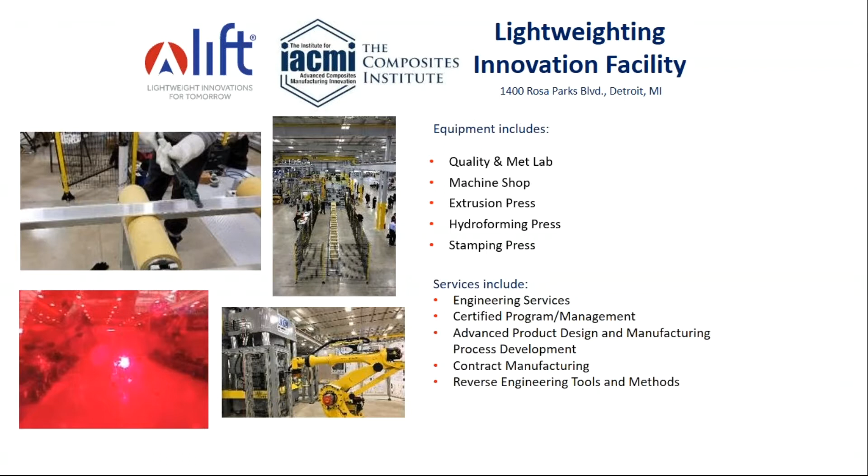Here at our facility in Detroit, we share some space with IACMI, one of the other institutes that focuses on composite materials, which is apropos for our conversation today. We have a 100,000 square foot facility here in Detroit, and you can see on your screen some of the equipment that we have available for your use and your R&D use. You can give us a call and schedule a tour or schedule some time on any of those machines. We'd be happy to show it to you.

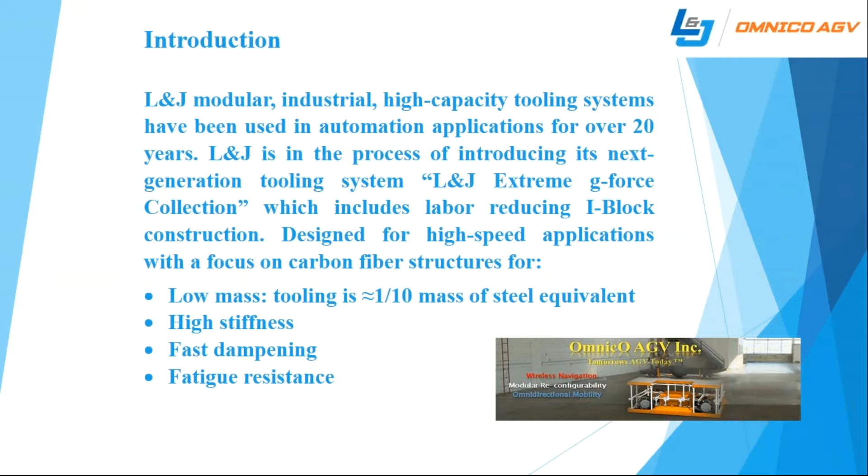So my name is Jerry Van Ness. I'm with OmnicoAGV. I'm a member of both LIFT and OmnicoAGV. I've been in the automation tooling business for over 20 years. On this webinar, I would like to focus on transfer of extreme large size automotive and aerospace panels, plus construction of AGVs, which is automated guided vehicles, with a focus on space frame construction that is easy to modify for shape, size, and capacity. I will show why our hybrid metal and composite tooling system, supported by both LIFT and OmnicoAGV, provides higher throughput than current tooling systems. Our product is called L&J Extreme G-Force Collection. It features interlocking blocks, or I-blocks as we call them, to construct tooling.

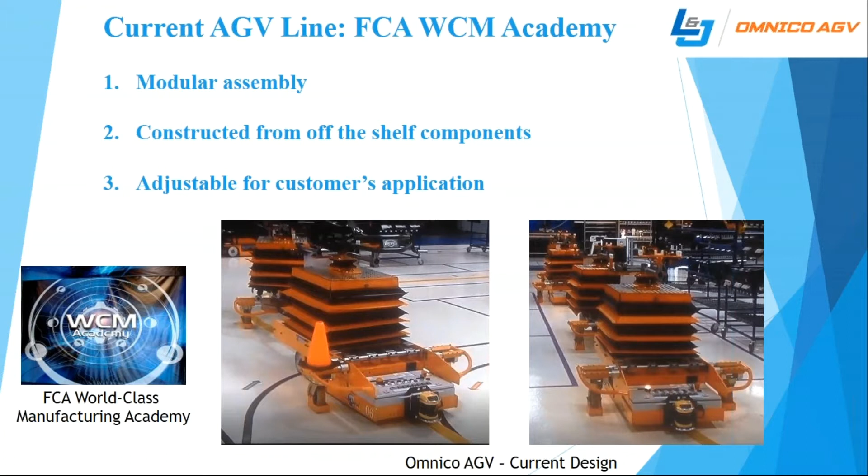These are a few of the customers we have been doing business with. FCA at the bottom, Fiat Chrysler Automobiles, World Class Manufacturing Academy. We have built an AGV assembly line that you'll see on the next slide. Our tooling system has been in manufacturing plants for over 20 years. At Fiat Chrysler World Class Manufacturing Academy, flip the next one, we built an AGV assembly line that is all modular construction from standard components. No welding. Advantages are reduced build times using off-the-shelf components. Modular components allow for ease of assembly and adjustment.

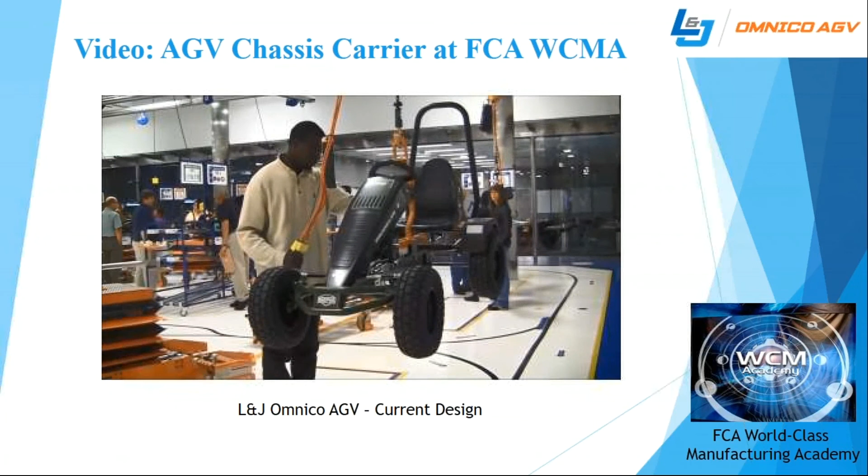Ability to reconfigure. The main appeal of a modular system is flexibility that extends over the life of a structure. Being able to easily move things around and make small changes while the structure remains in place can be invaluable, allowing for optimization of the assembly process over the life of a program.

This video is similar to the unit AGV at Chrysler World Class Manufacturing Academy. The video shows employees... can we go back to the other video? Just

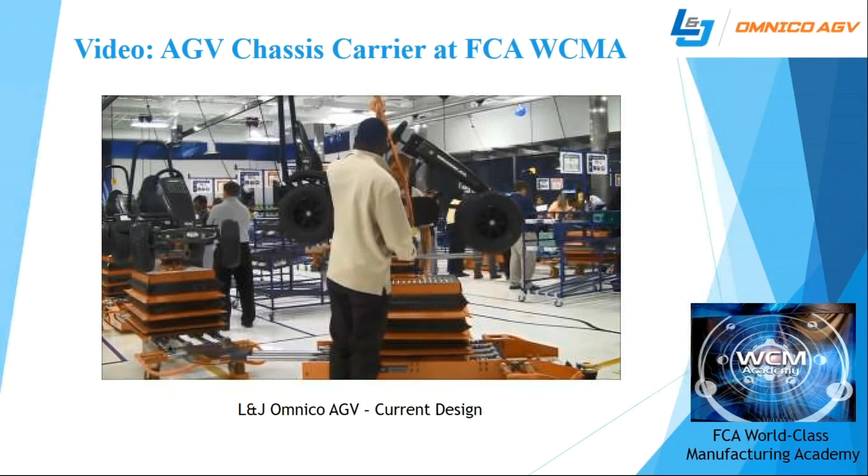Go to this video. The video shows the Fiat Chrysler Academy Employee Training Center. The AGV assembly line is the main focus of the academy. Each assembly transport vehicle has a lift platform that can be adjusted to the work height to match the process. The moving line teaches the entire assembly process of a vehicle. The last stage is removing the completed vehicle. The vehicles are later put back on the moving AGV for disassembly. This process is repeated many times during the day. Now if we can flip to the next one.

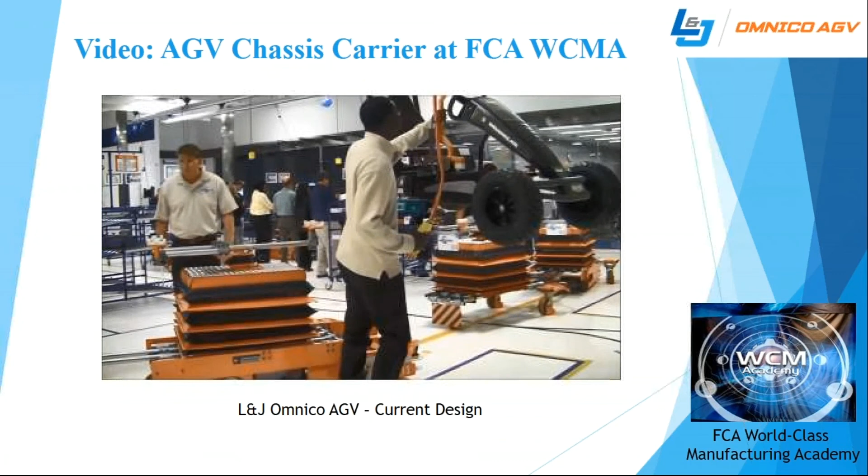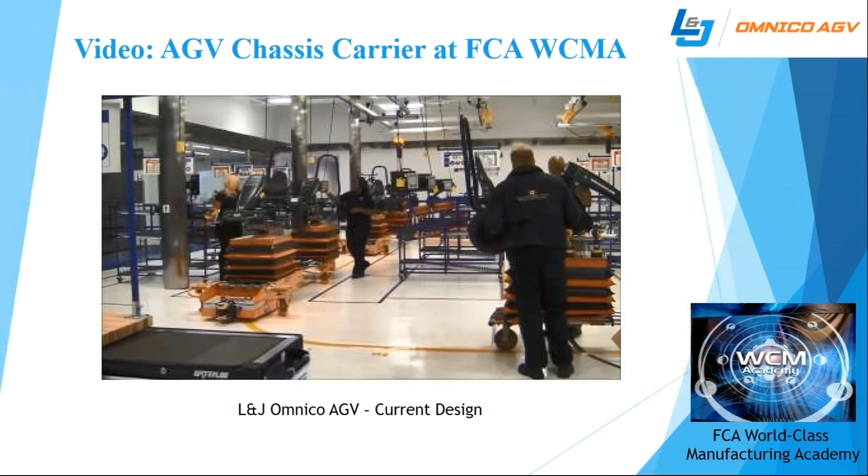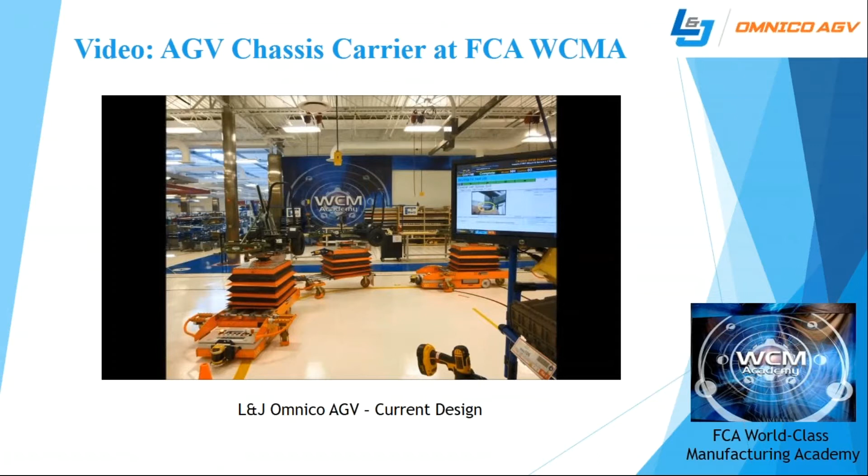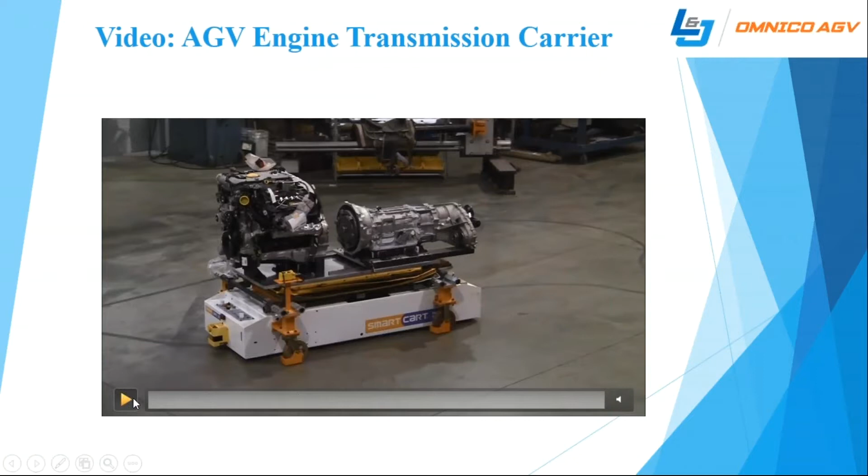This video shows the marriage of an engine and transmission. This is for a moving assembly process. The transport vehicle built by L&J includes all tooling and is similar to the ones at Fiat Chrysler's Academy. An all modular build that includes a lift platform to get correct work height. The lift platform is used when there is a transfer from the AGV to a moving overhead transfer line. Both AGV and transfer lines are moving at the same speed.

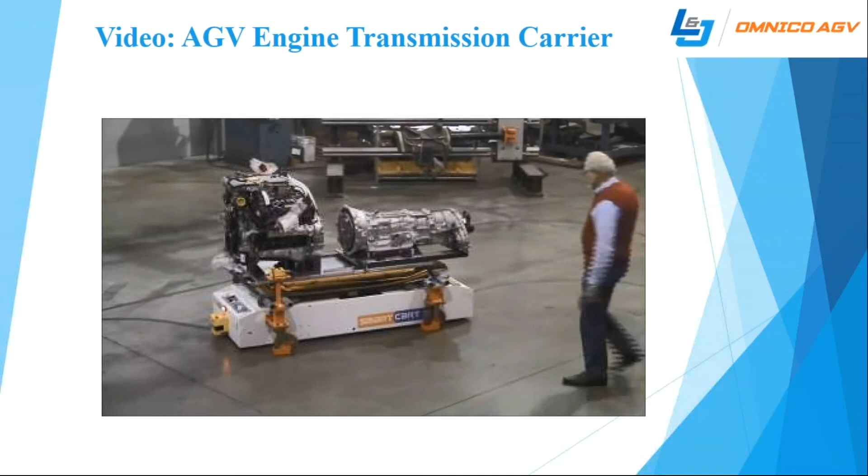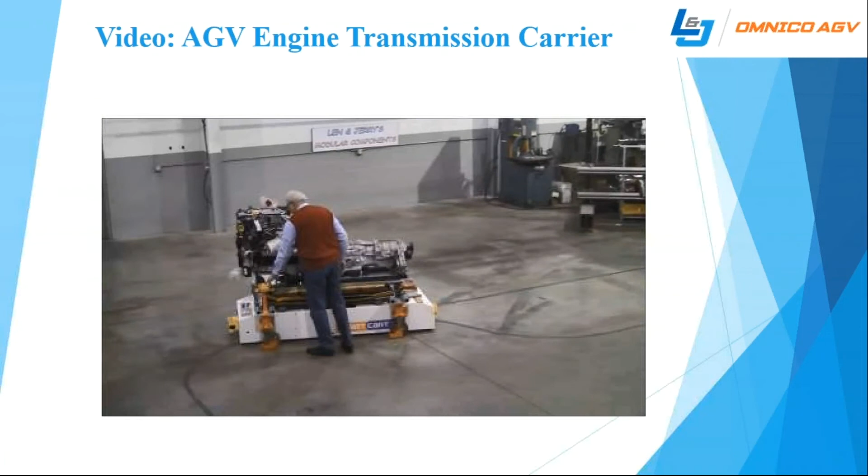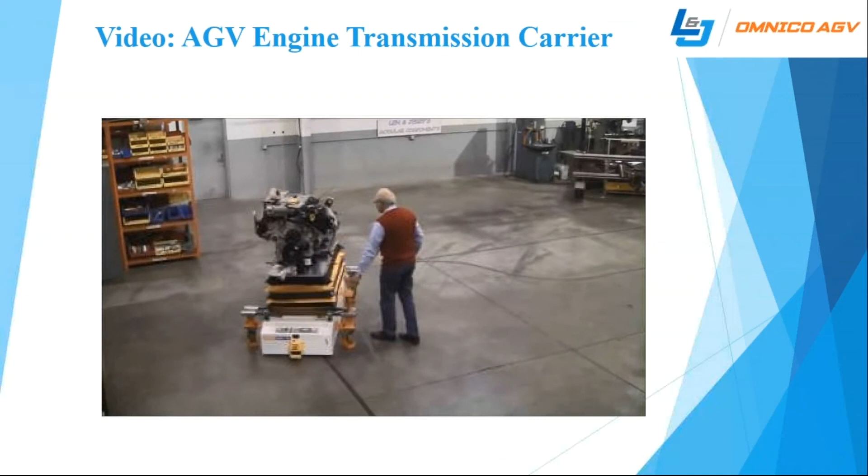This AGV is designed to also be a mobile work platform that the vehicle assembler works off of. All the vehicle build components can be kitted and on the AGV for assembly. The AGV design allows for an assembler to walk on and off the moving AGV. There can be two assemblers on each side of the AGV.

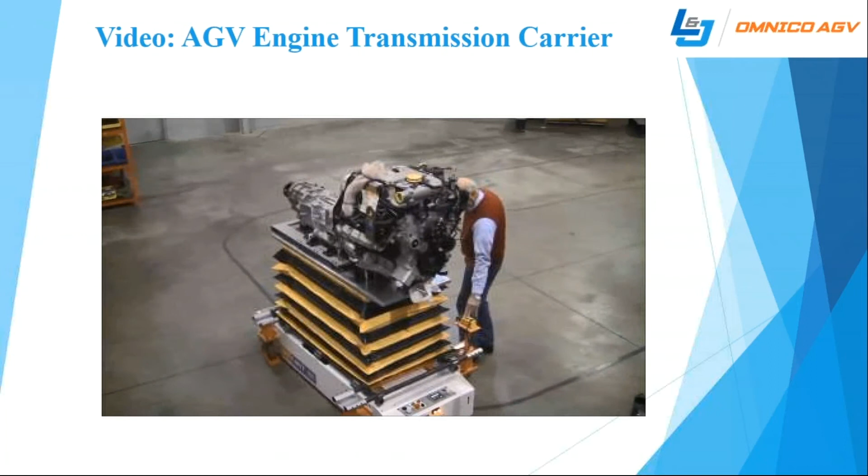The omnidirectional AGV can move in any direction, and also rotate at the same time. The video shows the AGV moving to a location, stopping, then rotating. The AGV moving to location can rotate during its first travel and be pointed in the right direction when it arrives to follow the planned path.

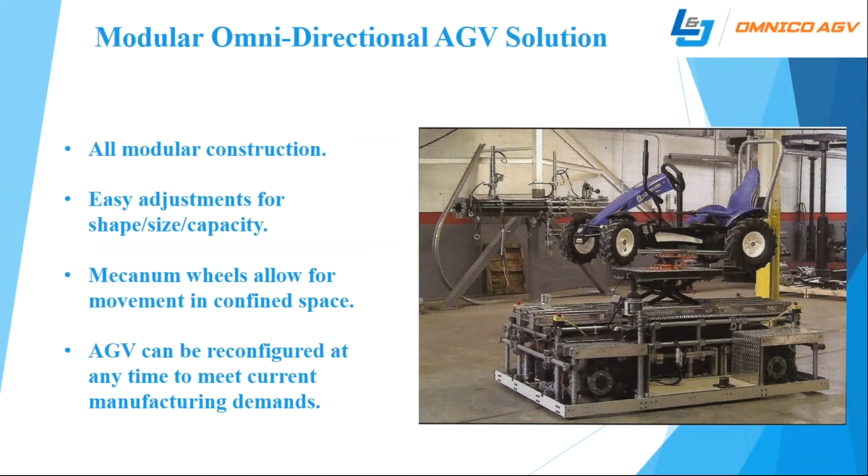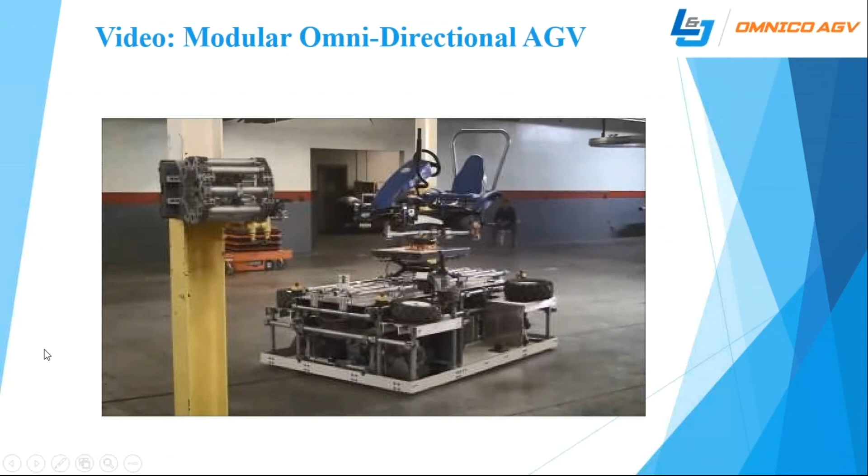These vehicles can adjust from the planned path when they find an obstruction in their way, go around the object and get back on the planned path. This is what you see now: moving around something in the way, which is the same vehicle that we're moving around at the Chrysler World-Class Manufacturing Academy, doing the same project. So the operation can be more automated, where you can work on a moving platform rather than walking alongside it.

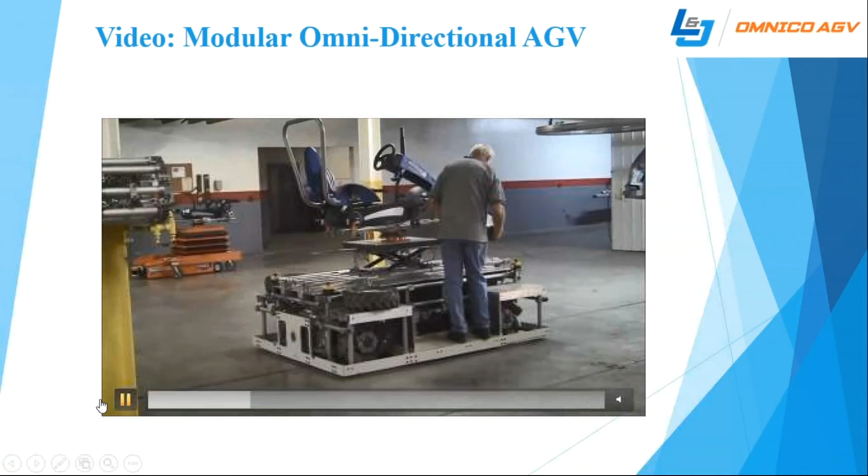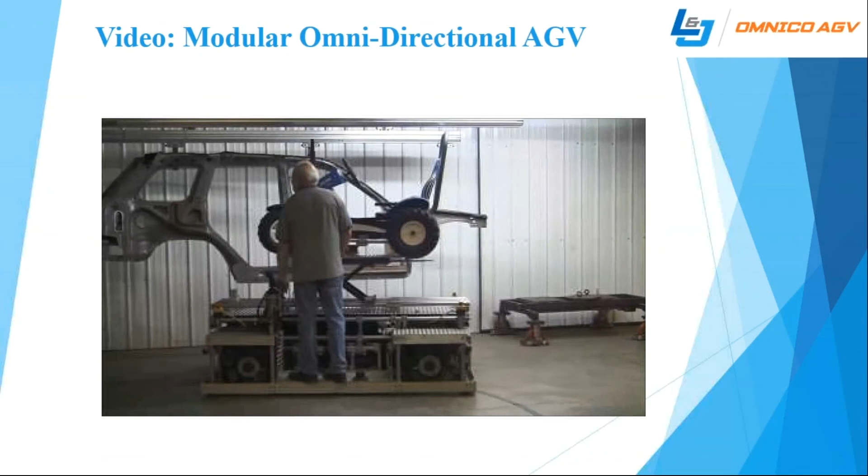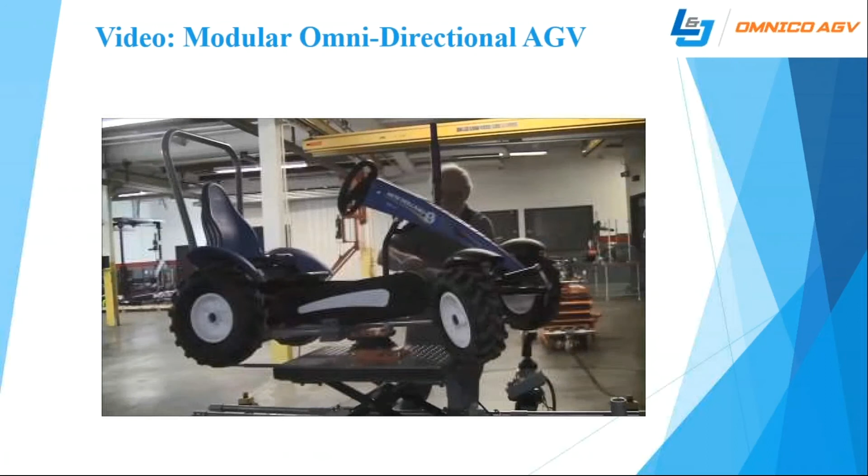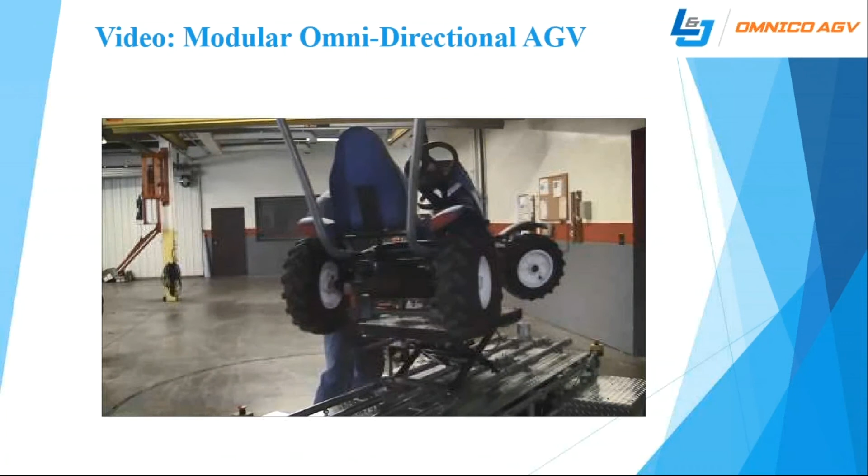L&J eye blocks, interchangeable blocks, are Lego-like and can be used to build anything you can imagine. All robots require end-of-arm tooling. Tooling can be welded steel construction or modular construction. L&J is focused on extreme large-size tooling, where a welded steel construction tool will be too heavy for a robot, and the deflection from the tool's own weight will limit its performance. Our main focus is on hybrid eye block connections and carbon fiber open architecture tooling.

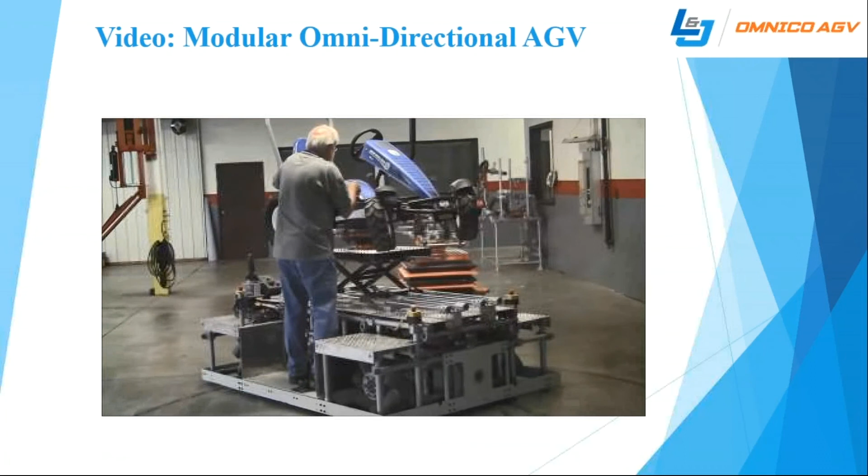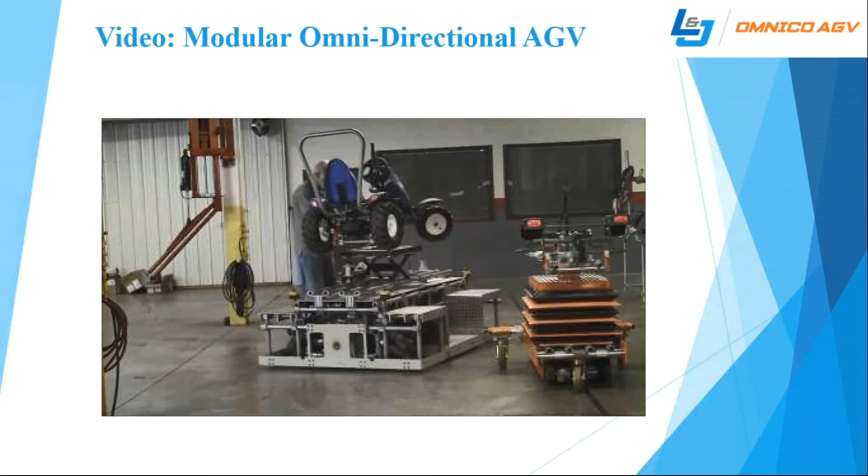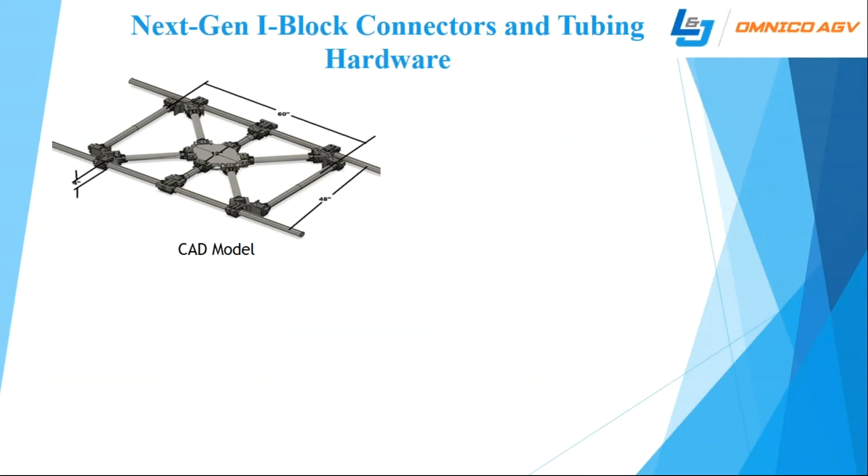It's important to note that this type of system affords a rapid build for whatever space frame structure you're trying to make, and it only requires low-cost tooling. Moreover, the hardware itself is easily configurable, and if you have an already assembled space frame structure, it's easy to change components without having to disassemble or affect the remaining structure.

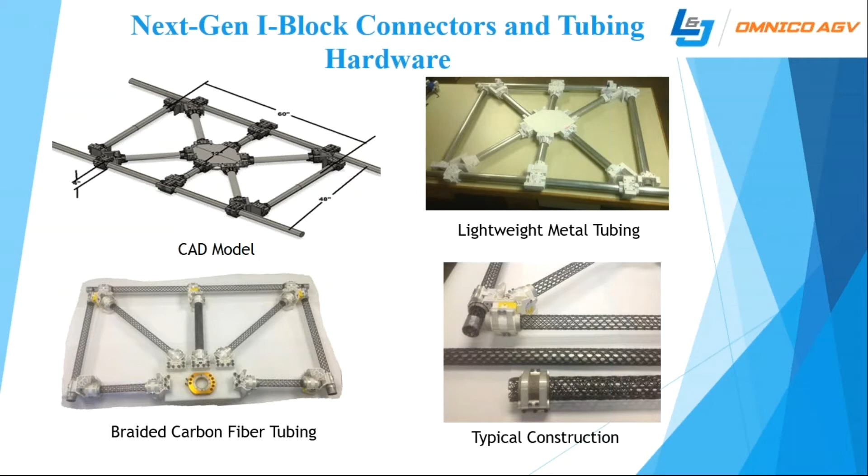And once again, one of the interesting aspects of this system, and also that which ties us together with IACMI, is the open architecture carbon fiber tubing. That tubing is quite impressive when you hold it in your hands. It's incredibly rigid and incredibly lightweight. So with that said, we're going to move to the next slide, and I'll hand it back to Jerry here.

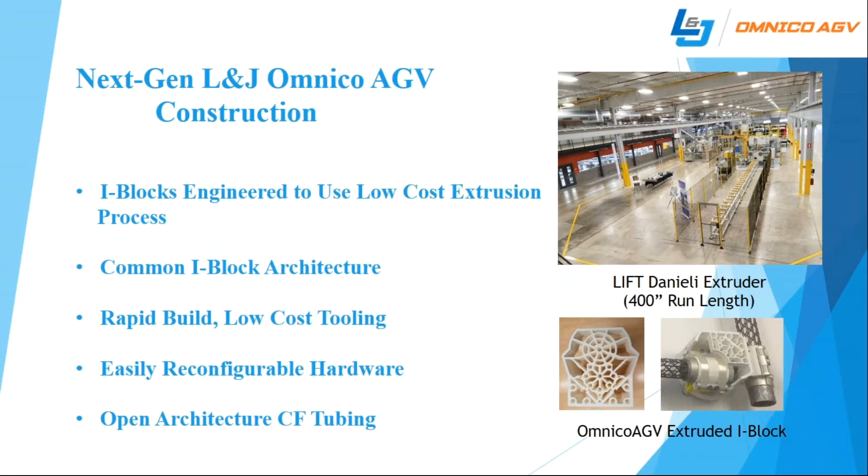All right, the advantages of the I-block are basically that they're very easy to adjust in terms of any shape that you want, any size payload that you need. The energy-absorbing elastic liner basically distributes the load uniformly and eliminates point loading, and that can have a pretty big effect when you've got these very large, long arms that can approach 30 feet or even go beyond that, as Jerry will talk in the next few minutes. And by doing that, you basically are minimizing the shock loads that go into the structure, as well as minimizing the torque that's acting on the connection points.

The non-slip adjustable reconfigurable space frame tube connections give you a tremendous amount of flexibility, not only in being able to build the machine initially, but they also allow the machine to be reconfigured very easily. And Jerry will talk about this in the next few slides here, but basically you can train people very quickly to be able to configure the space frame, put it together, get it working, and then a year or two down the road, as you change products, you can very easily change over to make this work, use the same components, carry them over, and use them for the next platforms that you are putting into production.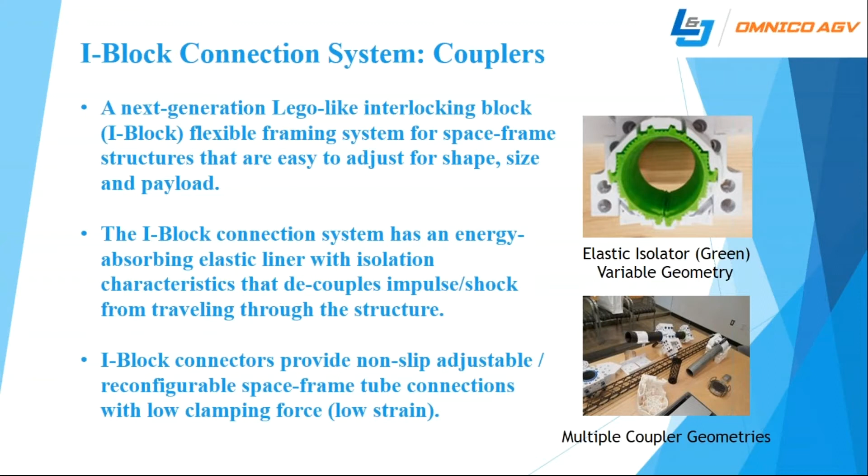The low clamping force is very key. This is all directed at minimizing the input loads to the structure. With welded structures, you typically create heat-affected zones that lower the material strength. What Jerry has done with this system is basically eliminated heat-affected zones, which means you essentially increase apparent material strength, and you've also reduced the potential for fatigue issues.

I'll take this one. Okay. So, the return on investment increases as the tool length increases in size. Open architecture tubing is damage tolerant. It can take a high clamping strain plus transfer load strain. It is a rope braided structure where one rope breaking does not affect the other ropes. So this tube, you can get extreme long lengths. It doesn't have the weight effect that the steel has. You can increase the section height that changes the stiffness and load carrying capacity. And then the next slide is, Greg will respond to the next two slides.

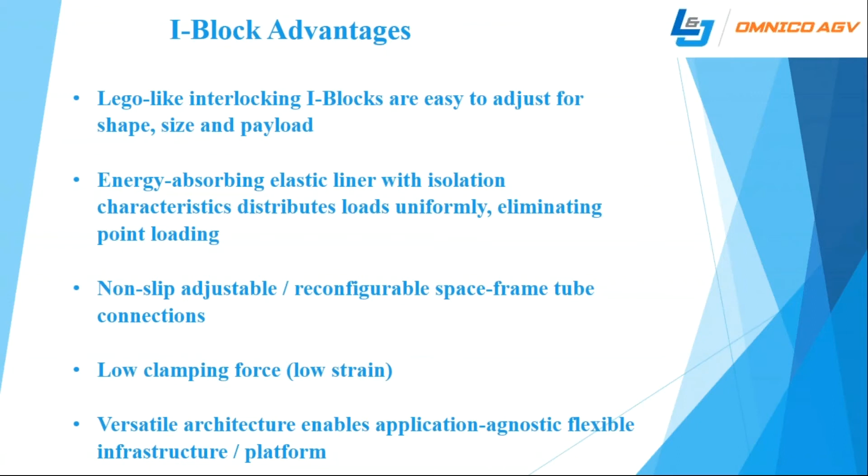All right. Basically, what we're talking about here is the return on investment as the product gets larger in size. This open architecture carbon fiber construction, the braided tubing, allows for much longer structures by essentially being very, very light as opposed to steel structures that are traditionally used. And what that means is as you get longer and longer, you got more and more torque acting on the connection points, which can cause long-term fatigue.

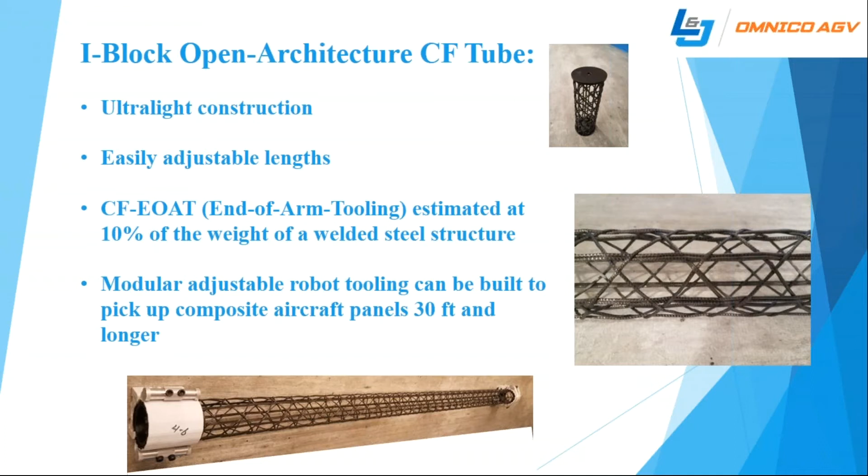There's a lower cost associated with this by increasing the section height. And when you increase the section height, you're essentially utilizing base times the height cubed divided by 12 physics. And what that means is if you double the height, you can essentially increase the section inertia by a factor of 8. So that's a very key part of this. You can do this very, very easily and at minimal weight to achieve these increases in section height with the OmnicoAGV construction. And this reduced torque acting on connections is always a very, very positive thing to do. And this basically minimizes any sort of durability concerns, especially combined with the elastomeric construction that gives you a lot of flexibility. Gary will talk about that in the next few slides here.

The low mass of this end effector basically allows you to build smaller robots because the critical support structure is now smaller, is now lighter, can be much longer. The 10% of the weight of a steel arm is very significant, giving you the potential to make these units very small in terms of the robotics, which reduces the cost. But not only that, as you get the smaller robots, you need less energy to drive those. So that basically contributes to long-term cost savings through reduced energy costs as a result of the smaller robots.

The reduced cycle time to get to higher speeds gives you more opportunity to do more. That's another key factor here, that these lighter weight units have much less inertia than the steel units. They can contribute to increased throughput as a result of the reduced cycle times per unit job.

The next slide here is basically the assembly. This is very key. No welding, which means you don't need skilled labor to put this together. Jerry estimates that you can train employees in 4 hours to be an expert at assembly. It's bolted construction. There's no skilled labor required to construct it.

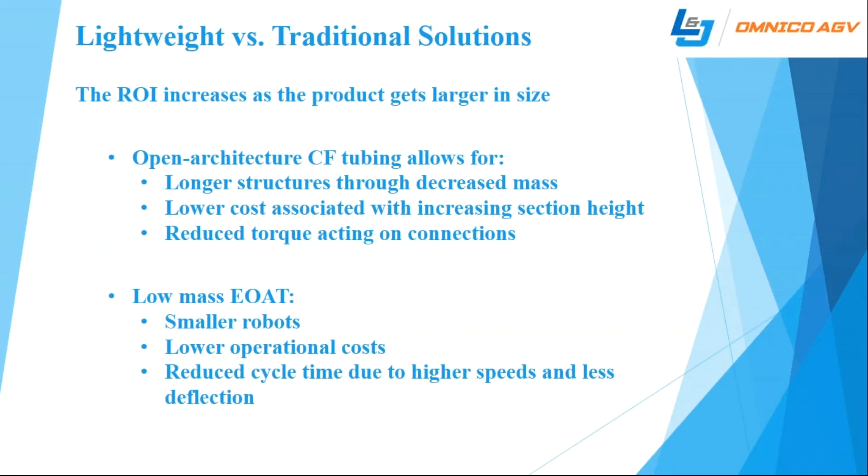And these individual component changes can take place without affecting the remaining frame. So you don't have to cut a welded part apart to change the geometry of this machine. You can do it very easily by simply unbolting local components and inserting longer, shorter length parts.

The long-term viability creates economical advantages. There's no obsolescence, changing plant layouts. I-block modular interlocking components replace fixed geometry welded structures that do not allow for easy, rapid configuration change. And that's always been a problem with welded structures. You have to weld them, you have to stress relieve them. It's difficult to change. Then you go back and weld on them. Then you have stress again and major problems.

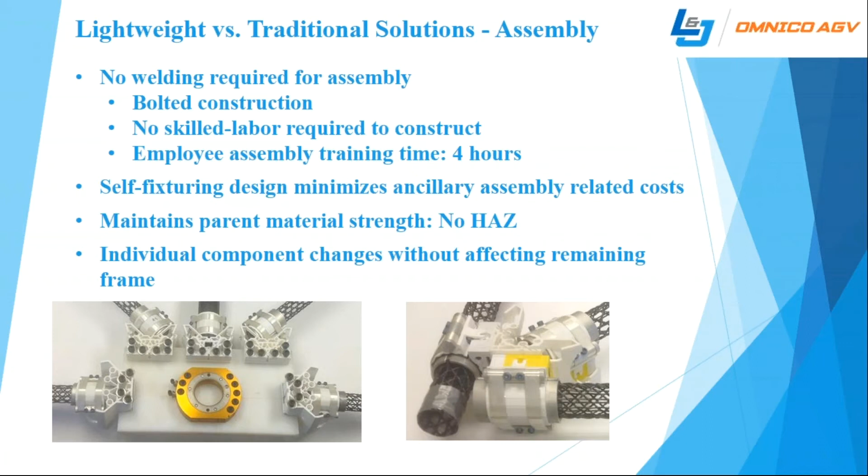And with new metrology systems, you can place anything on a tool, and then you can calibrate location, and you can shim it to location, so you can have high precision with a structure that you can just build like Legos, and you get the same precision out of it.

Okay. So Boeing didn't say the 777X, but they have a new 777X wing. That's all composites, 110 foot long, it's carbon fiber. And so there are some large AGVs that are built to move the 110 foot long wing. And a lot of these AGVs, you can use them also for an assembly fixture.

So if you're building an assembly fixture that's mobile and movable, and you want one for 110 foot long, same length of the wing, and you made it out of steel, and you have a composite wing, it doesn't match the thermal expansion of the composite wing.

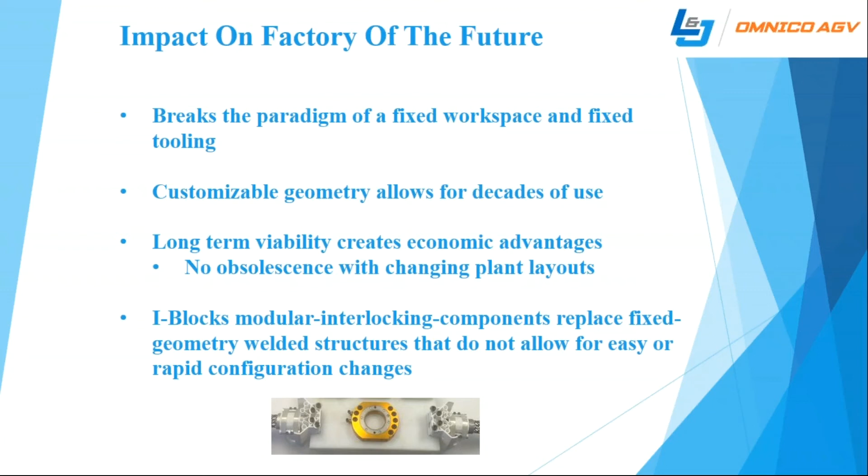So with these I-blocks, you can use carbon fiber tubes to create the full length fixture. You just stagger the tubes, you can have holes in them for snap-on components, and you can have a full length fixture that matches the thermal expansion of the carbon fiber composite wing. And for an all aluminum wing, you can use the same I-block with aluminum tubing to have the same thermal expansion.

So a 110 foot long steel welded fixture is too long and too wide to transport. So you'd have to build something with steel on site. If you have a modular fixture, you can build it on site with your regular workforce and match the same thermal expansion to whatever you're building.

The advantages for aerospace is open space manufacturing, no fixed equipment, which allows machines to move around and do work. They're easy to upgrade, modify, reconfigure. Modular components allow for change while the structure remains in place, and this is a real big benefit. It allows for the assembly process to be optimized over the life of the program, which means that you can continually upgrade it, constant improvements.

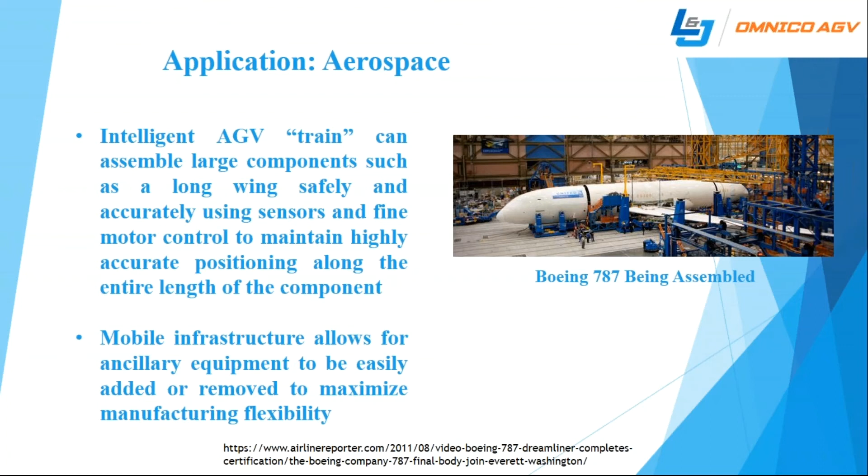We have developed a concept AGV, which you'll see shortly, that can drive over a wind blade and do manufacturing operations over its entire length. The current manufacturing process is not automated, and factories are not close to the wind field, making transportation difficult and costly. So the intelligent AGV can assist in field assembly of large components, such as wind turbine blades, using sensors and fine motor control, retaining high accurate positioning along the entire length of the component.

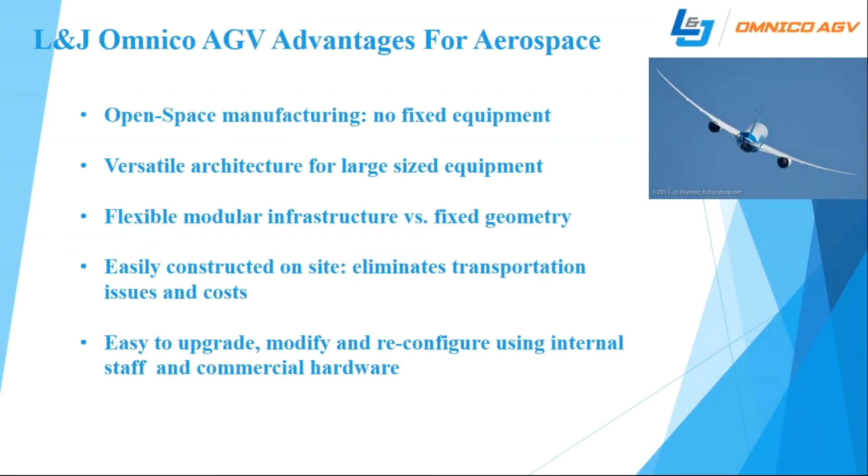Wind advantages. AGVs can be transported in sections to a job site and assembled. It is easy to disassemble and transfer to another job site. The assembly process needs to be automated to build blades on site, and AGVs can provide those functions.

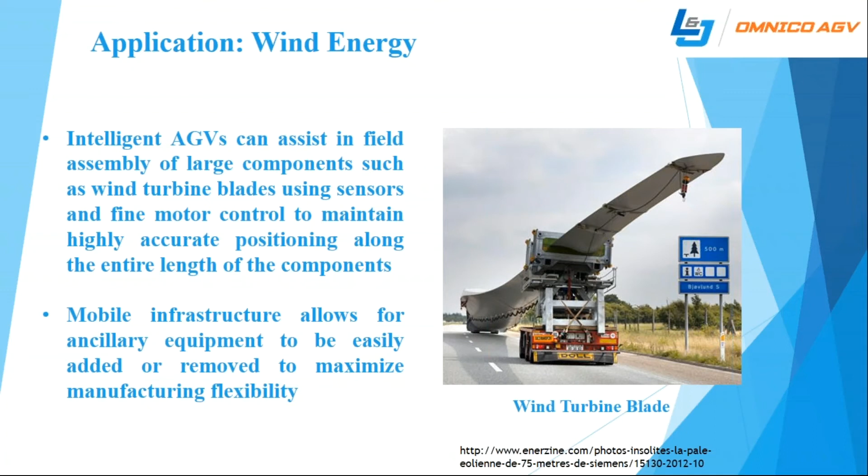This is where I was talking about the next generation AGV. So this is a concept. This AGV can drive over a Boeing 777X wing, wind blade, and we have some other versions of them that have a smaller footprint where it's a 3-column, single arm, and the wheels can float, so it's great for agriculture. So you can have a vehicle that can drive over a farmer field. It can do maybe 20 rows at a time, or you can pick all 20 rows.

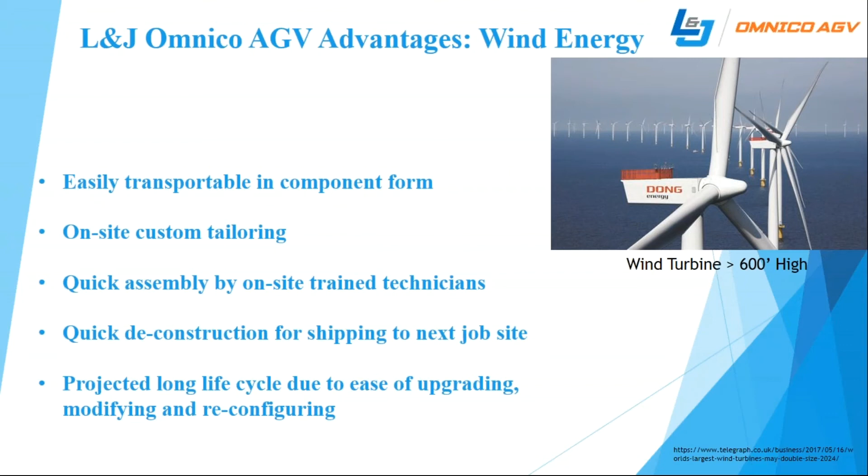Lightweight: you have a problem with soil compaction in fields and irregularity, so you need an extreme lightweight structure, and you can use motion tracking to find things you want to pick. If you want to pick pumpkins or other things, you can automatically track those things. You can have a storage bin on these vehicles. They can drive down one row, rotate, go down another row. So there's a lot of advantages.

So this machine is multitasking, and it can perform normally dissimilar operations in one location. So there's 3 separate arms there. The other structures could be welded steel or other things, but the arms have to be a carbon fiber structure; they're 20-foot long. And when they're that long and you have high acceleration of mass moving, you need something lightweight that can move fast, that dampens quickly, high stiffness.

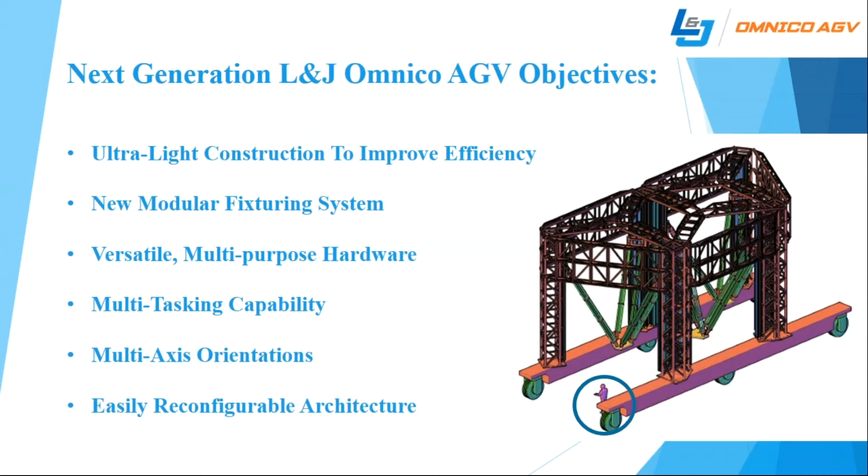And if you see some of these machines that are picking up candy and putting it in boxes, that move faster than your eyes can follow, this machine is basically a similar design that can do those things. Only when the arms get 20-foot long and you have movement, there's lots of problems. They have to be extreme low mass, high stiffness, and that's what a carbon fiber structure can do.

And then what we're marketing is the clamping system, being the eye blocks with the elastic liner. That's the main connection that allows all these things to be connected together, and if you snap the tube or something, it's easily replaced. So the three moving arms can each perform different operations while the AGV is stationary or moving. A high-speed motion tracking system can sync the machine to the workpiece, allowing for manufacturing operations while the AGV is in motion.

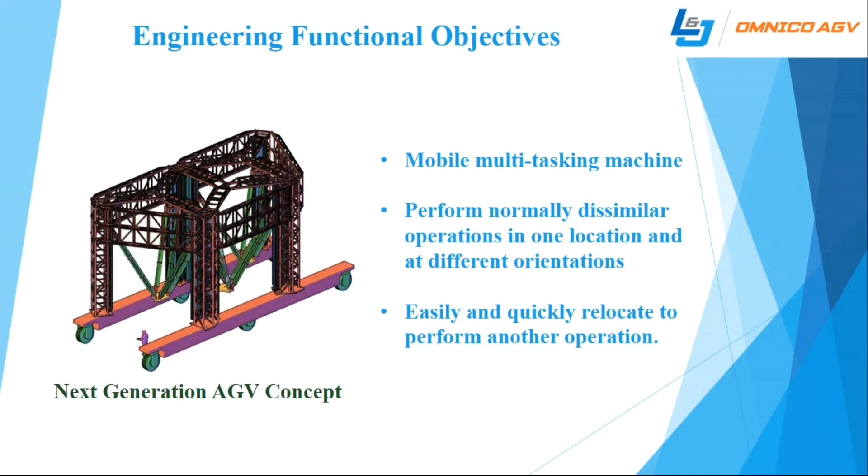So with a lot of things moving, you can have a motion capture system that picks points along your workpiece, whatever you're working on, and it can be moving and doing its function. So you have a defined program path that tracks with the part, and you can adjust for deflection and other things as you're moving. And with three separate arms, you can be doing three different functions.

So with one function, you could be doing a machining operation, the next arm could be doing a fine polishing or finishing, and the next arm could be doing a spray coating. So it could be doing three dissimilar functions all at the same time. So this is a real paradigm shift in manufacturing and space frame design, and all the control systems are available. All they need is a customer. So there is a problem area out there that needs to be addressed, and these machines can address it.

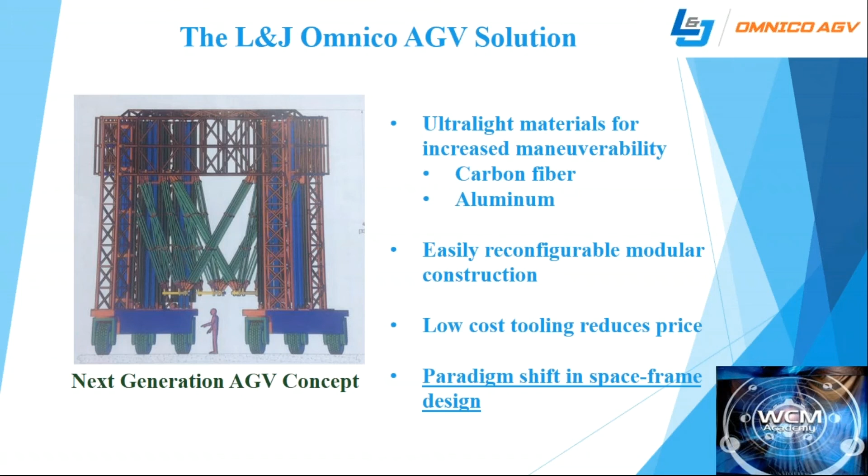But we do have some questions that came in, and I'll just address these to the panel because I'm not sure exactly who they might be addressed to. Can the isolator increase tool life by reducing the shock or impulse? Yes. So it isolates the transfer through the whole system. So if you have the elastic liner, it decouples the kinetic energy.

So if you're machining with a long arm and you hit different loading that wasn't programmed for, all that load goes back in there, and it helps share the load with all the other connections. There's just lots of tube connections on there, and it softens that energy. So it takes high load off the tool, the pressure.

All right. Do you expect longer life with the carbon fiber or aluminum arms? Do you expect that longer life for the arms, or for robots? Well, aluminum starts fatigue at cycle 1. So aluminum doesn't have a life cycle. Steel does. But carbon fiber is basically fatigue resistant. So either it's broke or it's not broke.

So the advantage is you can run high speeds. Big advantage is it dampens quickly, and it's low mass. So whatever you're doing, you can extend out 20, 30 foot to do things, and it dampens quicker. And then you just change the section height, especially with the open architecture tubing.